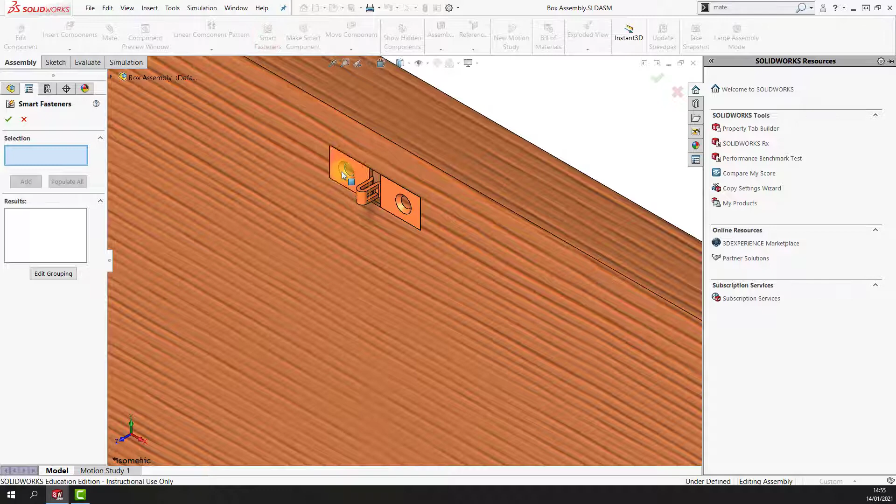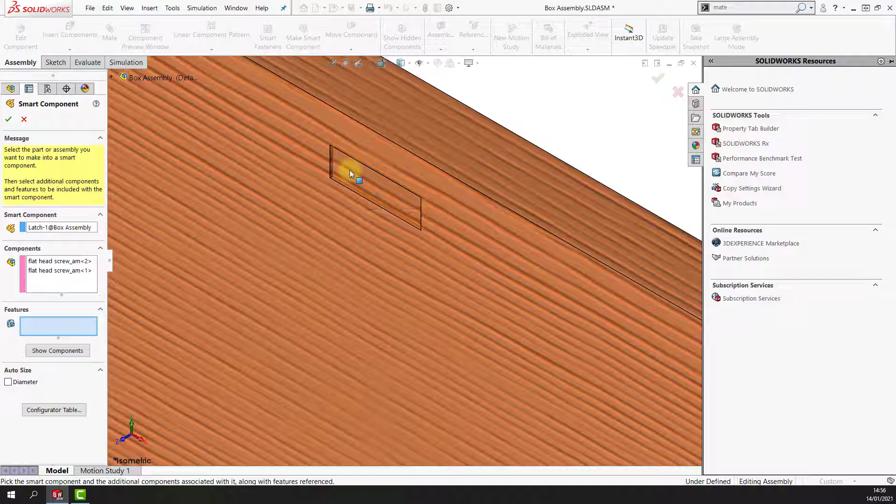And we'll add those in, and then we'll make a smart component. So we make a smart component, you get to select the little latch and then the two components, which is two screws. And the features, it's going to be this little cutout, so that when you bring it in, all those will come with it. So the two flat head screws and the little cut extrude will be done as well.

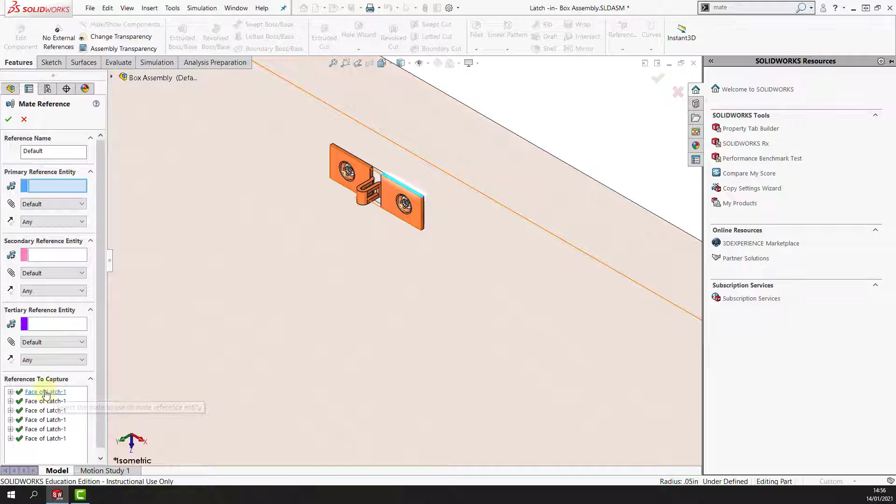So click OK on that. And while we're there, I'll just open this, edit the part, and we can create a little mate reference as well. It'll help line that up when we do position it in, and you can see as I move through these little references, it captures down here. So I go through that.

So if we take the fourth one down, that's the one we're looking for, the one that lines that up with the top face of the box. So select that one, that's the only one we really have any use for. This one, and then exit and save that. Save all that.

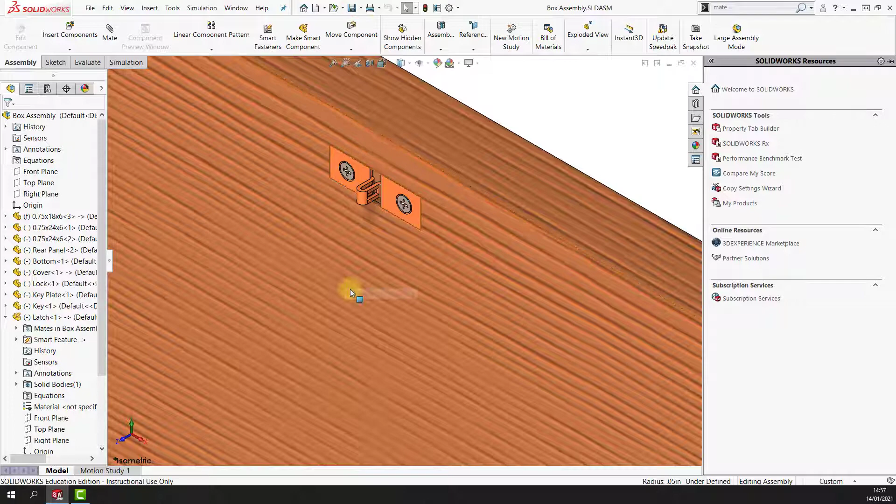And that's that. Now if I open up the next little test box, and there are a couple of named views in there, but honestly it's quicker just to rotate to the view, to be honest. So we're going to then insert our component.

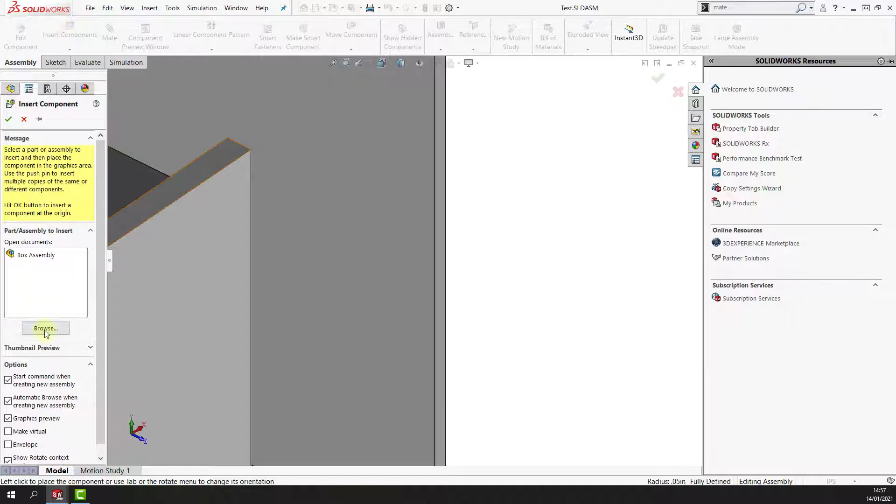So insert our little latch and pop it on there. And it's gone back into the box, so I need to flip it, the mate alignment, and click OK.

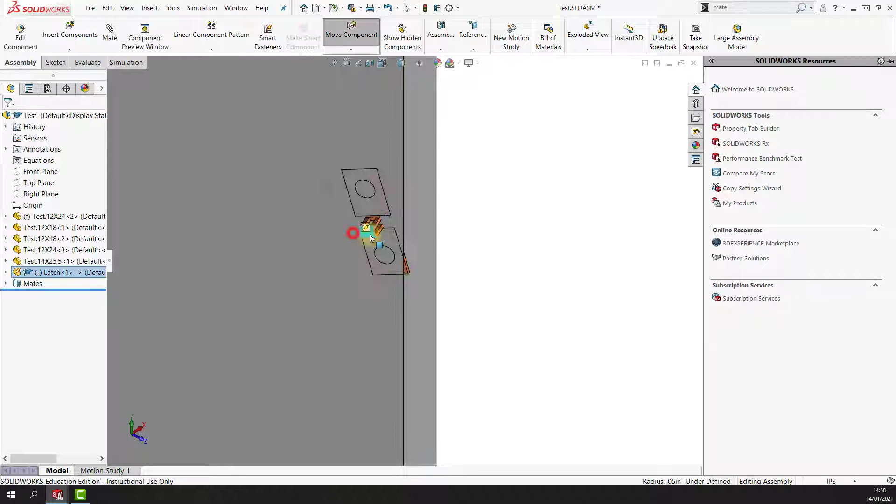Right, so I can access it better and pop in a couple of more mates. So I'm going to pop in that, and the distance mate, I'm going to make it 0.375 of an inch. Click OK. And then we'll also do an advanced mate.

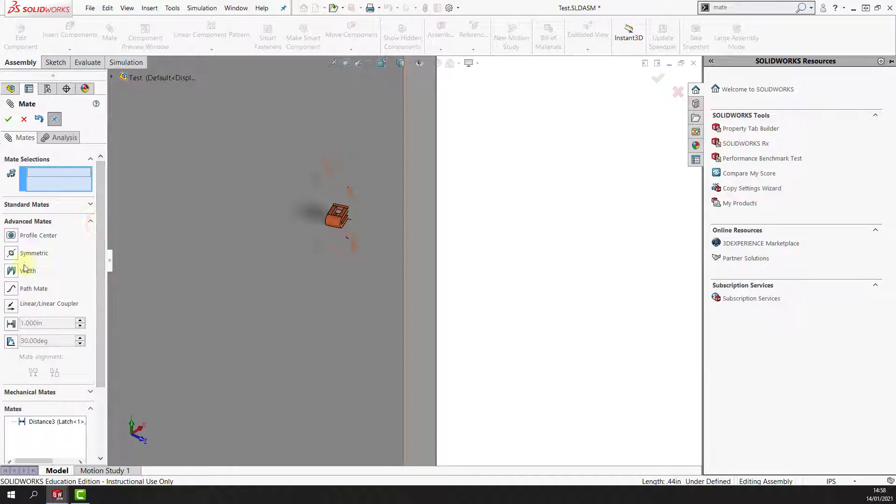Width mate, and because this is symmetrical, we can just pick this face and this face and this and this face, and have that centered on that face. Click OK and OK on that.

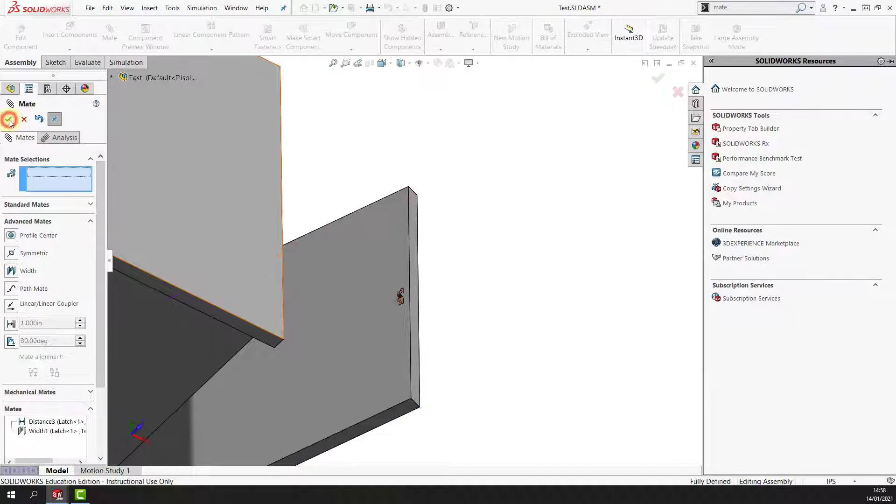My little doggy barking in the background.

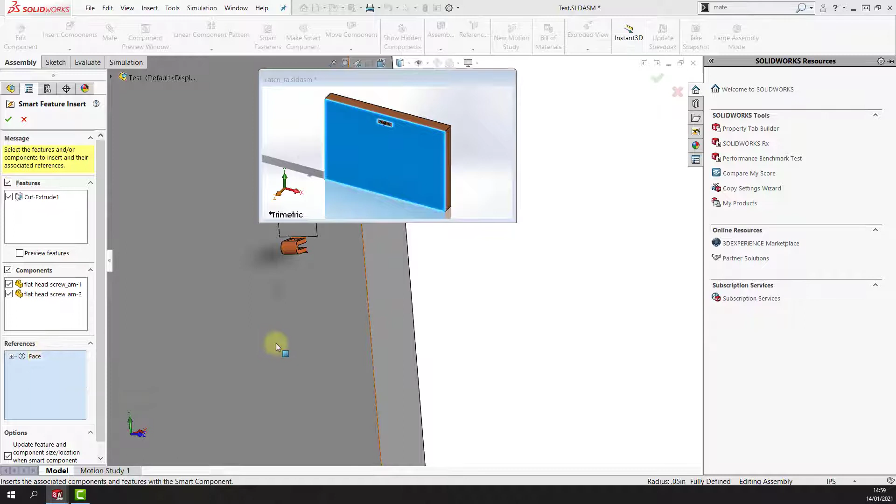And then if I select that component then, and we can insert smart features. So we pop in the smart feature, and it's only really looking for this face, the reference face we give. So I'll select that face and click OK. That's my little clip in there.

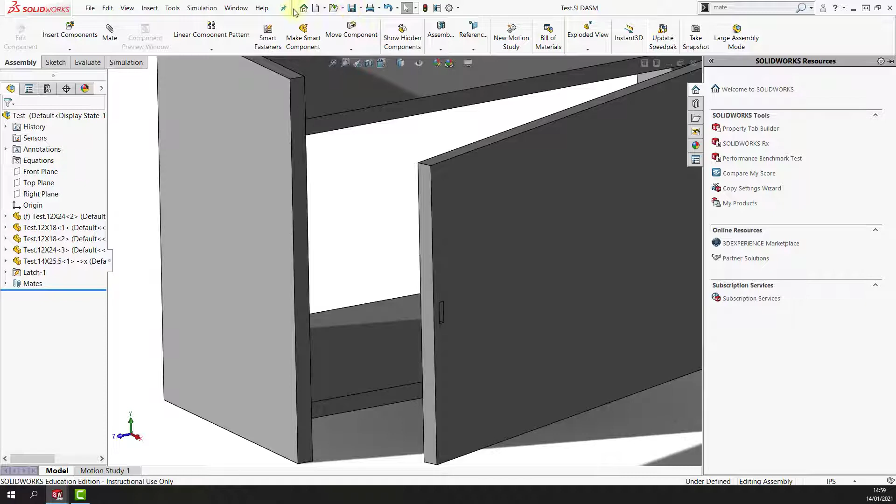Okay, so I'm going to do the next little lock. It's going to save that, and we flip back over to the box assembly.

And now we're going to do the same thing really to the little lock here. So again, if I pop in the little smart fasteners first, so I can get that better. So I'm going to add those two in, and we're going to make a smart component.

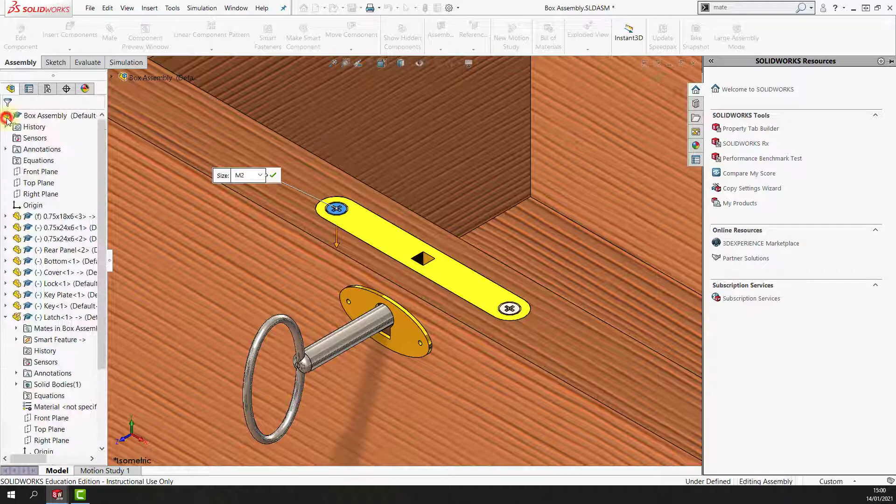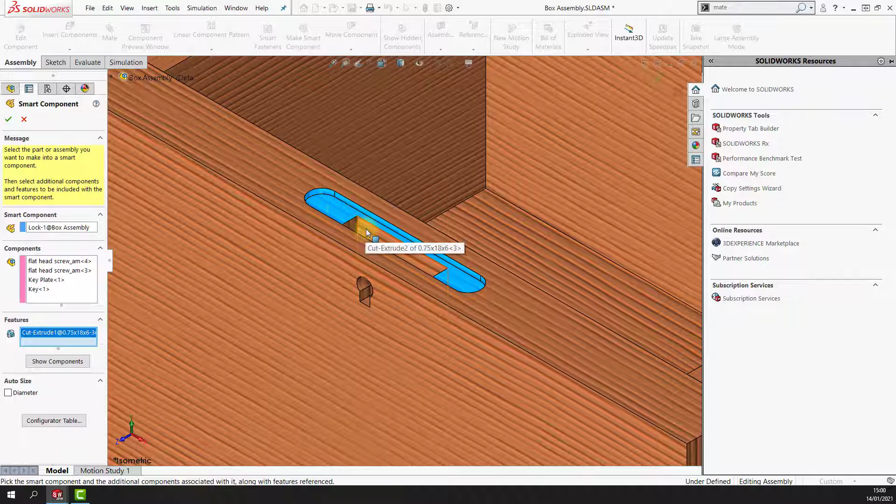And in there, so we got the lock, and in there the components we want as well. So we want a few extra little bits in this. We want both those little screws, we want that key plate and the key as well. And the features then we need are this little cutout, this cutout, and this one. So we need those as well. So I'll click OK on that.

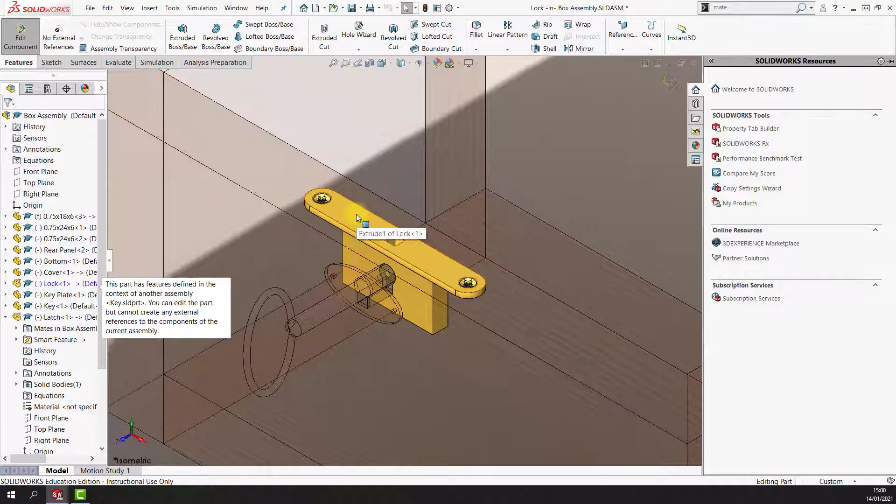And we might just edit this part as well, because we probably want to put in a little mate reference there as well. We take that top face, similar to what we did with the last one, so it's the third one down. So just take that top face and we'll add that little mate reference in as well, and save and close that.

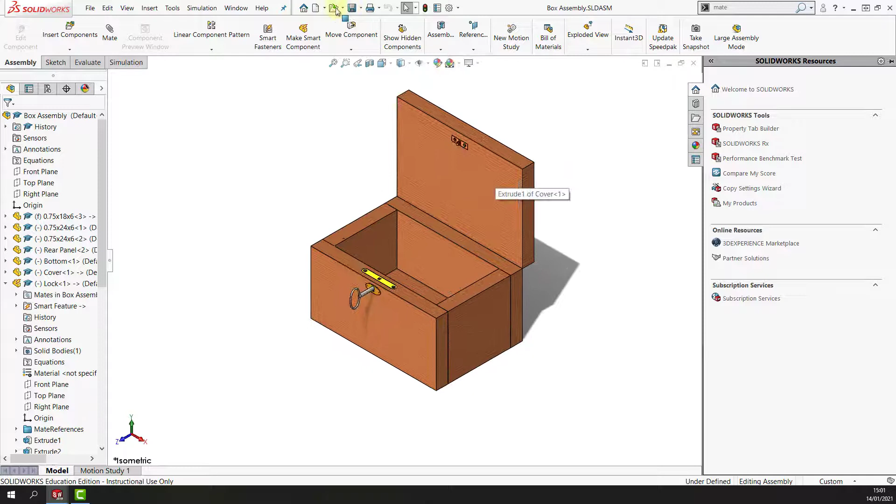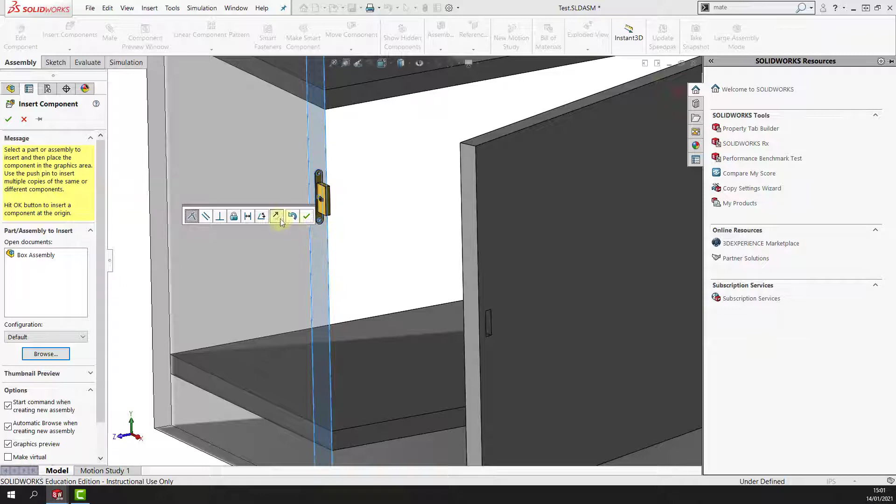And now if we pop across back to our test box, just say yes to that. And we're going to insert a component again, so this time it's the lock. And click on that face, that's a reference face, so just flip that around. Click OK, and I need to get that side on the outside.

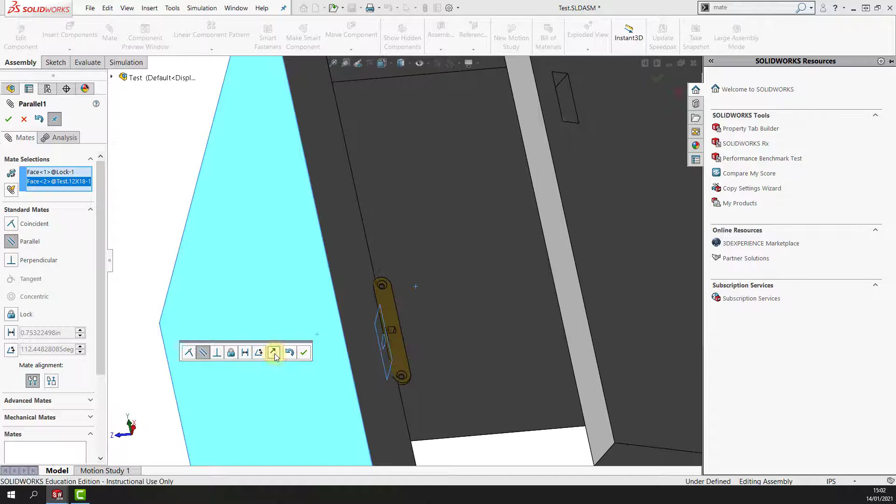Just going to pop a little mate in there, make that parallel. And I'm going to flip the alignment for that, so I get that round the right direction for me. And I'm going to do the vertical alignment, so I'm just going to center it on that as well. It's frozen me there for a second.

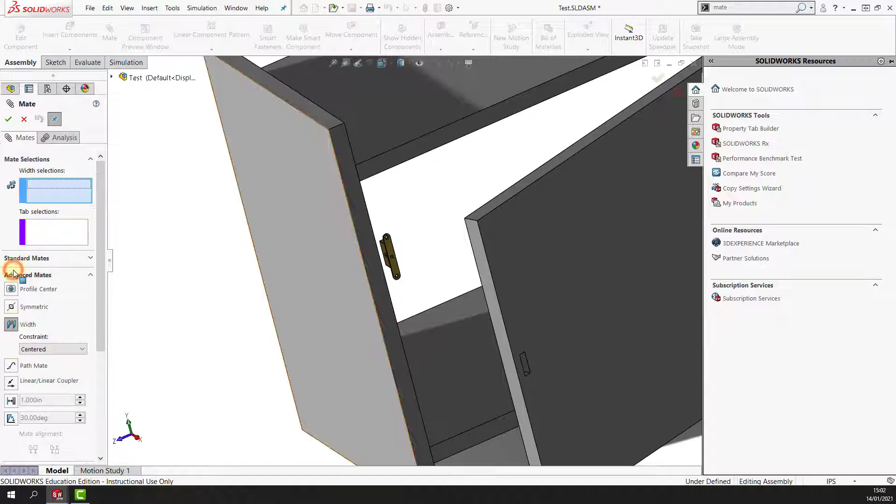So just go to my advanced mate and get a width mate. So again, if I just take the top and bottom edges of this, that'll do me. And any two faces that are kind of centered, that's all. I'm just going to take those two for handiness.

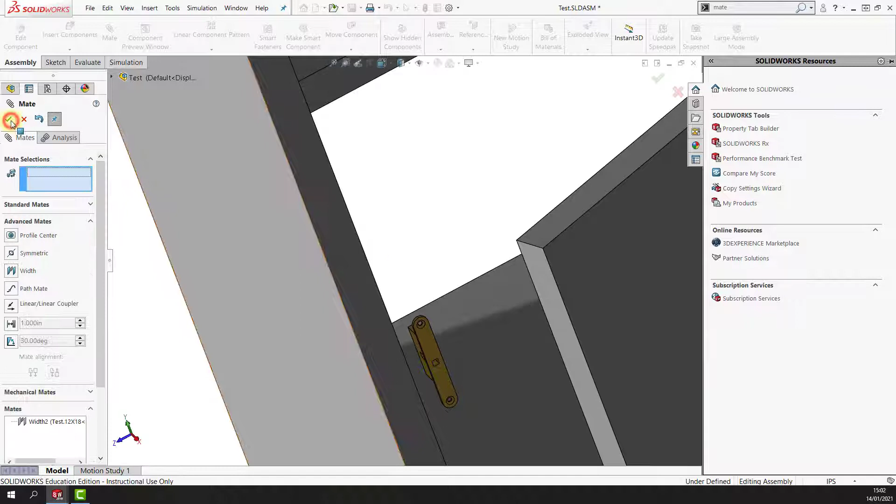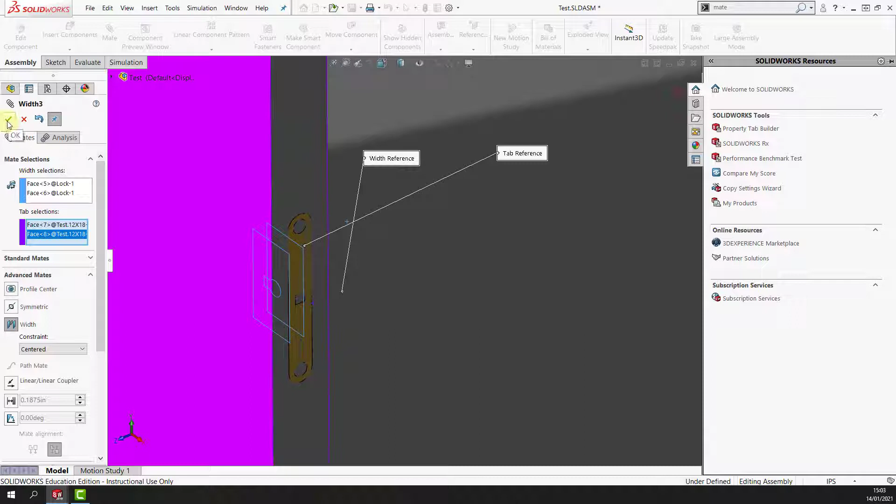Click OK, and then we'll do another little width mate on this. And this face, and this face. Doesn't matter which order you do them in, just as long as you get them in the right areas. So click OK on that, and OK on that.

So that's my lock, and I'm just going to select Insert Smart Features. I was just looking for the two edges that we said, so we need the top edge there and this edge here.